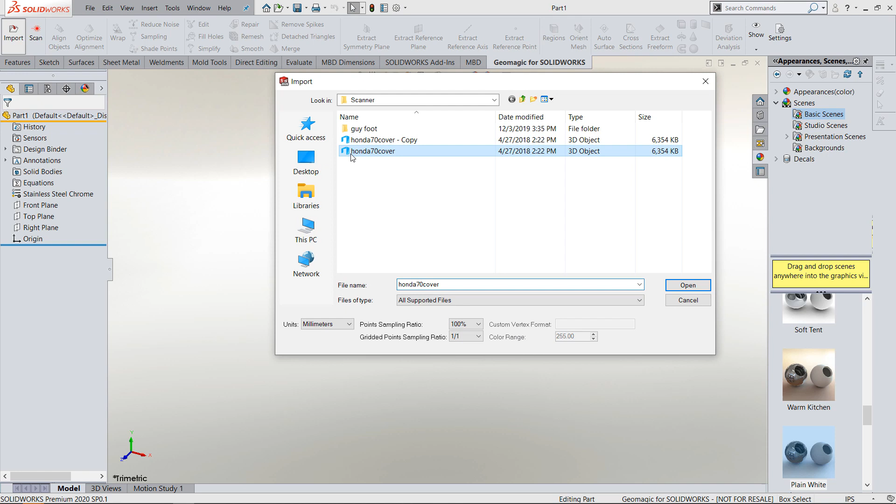From there, we go in and start a new part from scratch, making sure that we use the right units, or the same units that the model was scanned in. From there, we can use the Geomagic tool to import the scan model.

Now you notice how fast the scan model comes in with Geomagic. A large model that's 50 megs can come in seconds.

From here you can see the model was scanned. The model that was scanned was really an old broken side plate from my SL70. It's got holes in the top. Really the scanner created the holes in the top, but I left the sticker on the top.

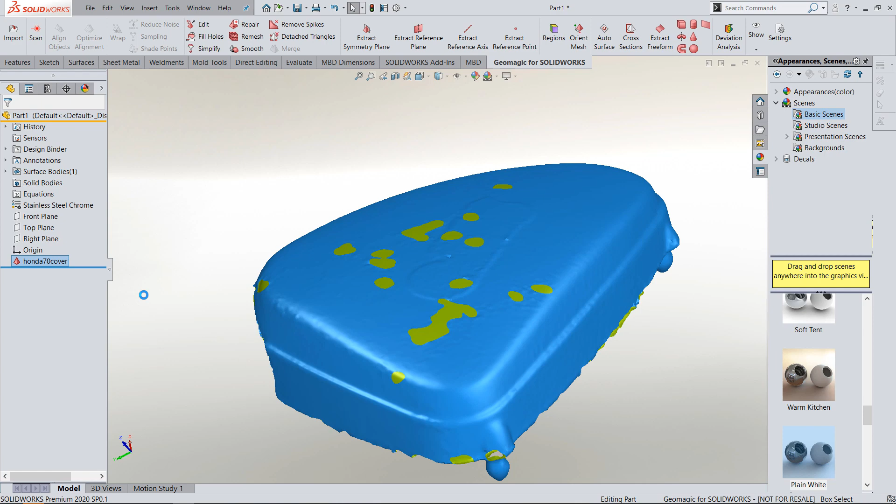You see the sticker. So I want to go in and duplicate the original scan so I don't mess it up. I'll use one as a backup.

I can rename features, I can reorder features in Geomagic. Every feature is independent and acts as though it's a native SOLIDWORKS feature.

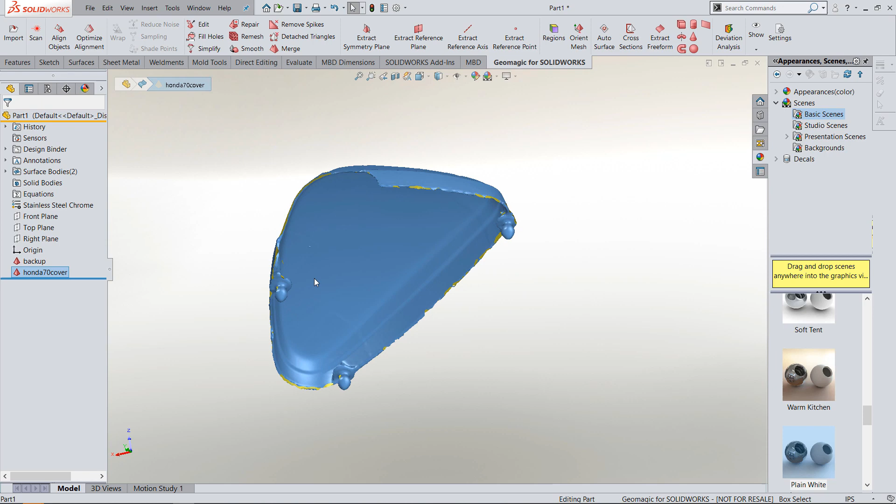It's kind of nice. From there, I kind of need to go in and look at establishing some planes that I can start working off of.

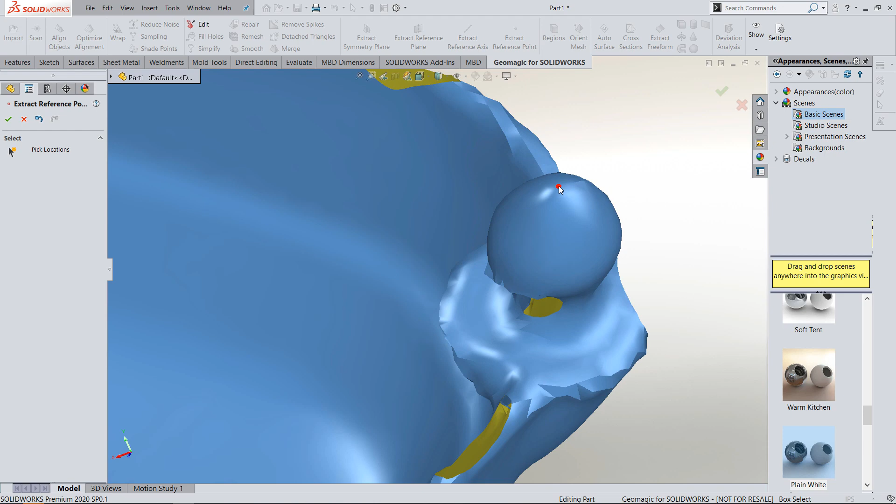What I really want to do is reverse engineer that top shape of the cover that's visible to the eye. So I've got these mounting bosses that I can utilize the very top tip of to go in and insert a Geomagic point.

Geomagic's got a nice point command. I can do a whole bunch of points in one, and I can go ahead and close out of them.

I might have put an extra point on there, and seeing that they act as SOLIDWORKS features, I can just go ahead and delete it independently of the other points.

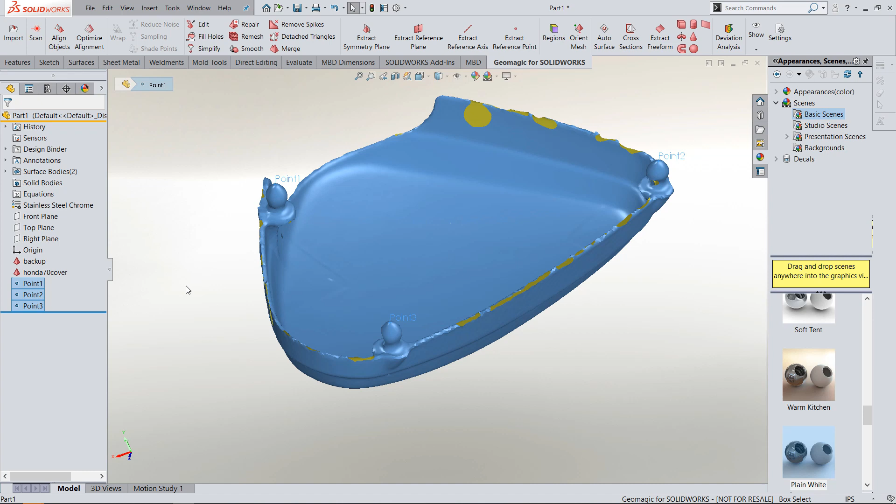And then I can go in and utilize the other points to create a sketch on. So I'll go ahead and pick those points and say create a plane.

From here, I'm going to use this plane to drive another plane down to the surface that I want to start using a manual technique of tracing around the cover.

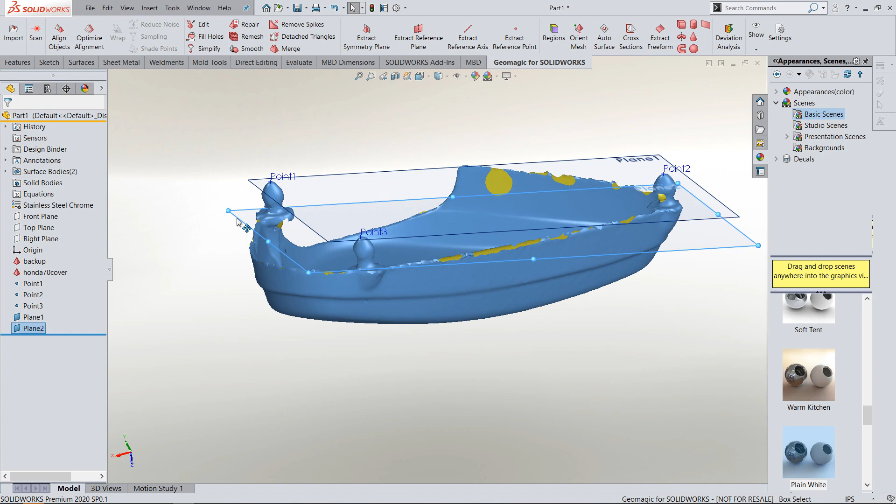Geomagic also has an automatic tracing command, but I tried using it on this cover and, seeing that the scan's so bad, especially right at this level, you get too many jaggies, and I don't get the parametric type of sketch that I'd want to drive forward with, to double click on dimensions and make some subtle changes to tighten it or tweak it around a bit.

So when I look at this cover, I can kind of see that it's probably three main arcs. Let me try sketching around here and see. But I think I've got three, I'll even say 3-point arcs.

One that kind of starts here, on the side as well, and then over here on this side. So I can kind of see three-point arcs connected to all the corner arcs, which would probably be tangents.

So again, let me just go sketch these and eyeball this out. So, and again, go in and do some tangent arcs across the whole sketch, get another one.

Maybe I should have turned off that plane that I don't really need to see now, but I'll get that later. Right now, I just want to use the simplest way, using the flyout menu, to click the point and make it tangent, making sure that I've got all my tangencies, since my last pick I was a little sloppy on and didn't get them.

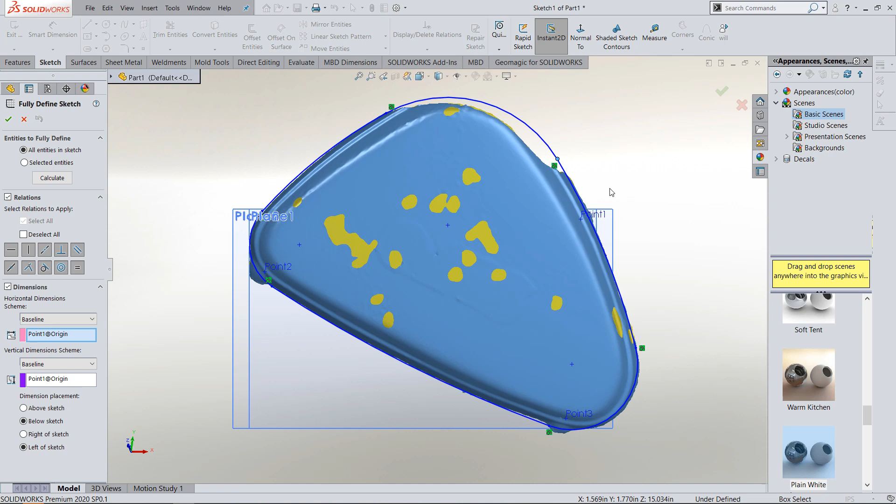Let me automatically dimension it. I'm not really concerned about the locating dimensions from the origin as much as I am the arcs, if I wanted to come in and start bumping them around a bit, but I like what I have here.

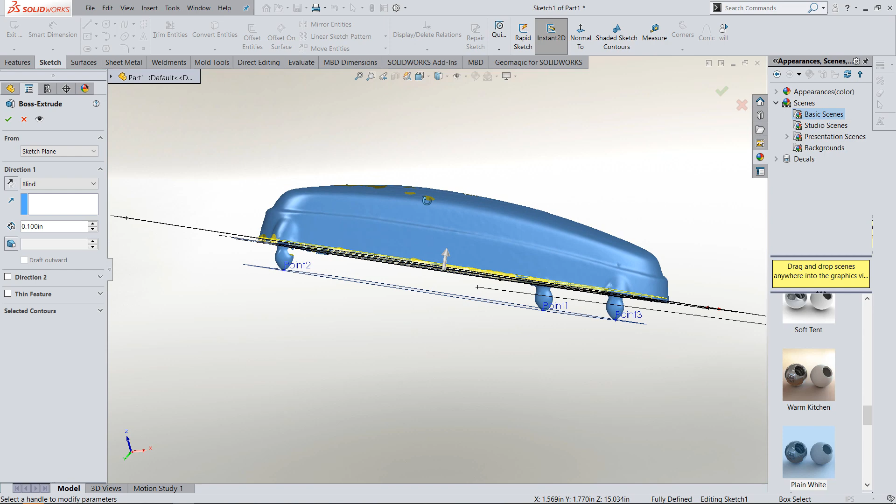I'll go ahead and hit the extrusion command and extrude this up. I didn't turn off my scan because I want to reference it. I'm doing a combination of utilizing Geomagic to work off the scan.

And also look at, as I model it, how close I am to modeling right on top of the part. So I'm just kind of eyeballing this. Maybe I can come in here and give it an exact number if I want.

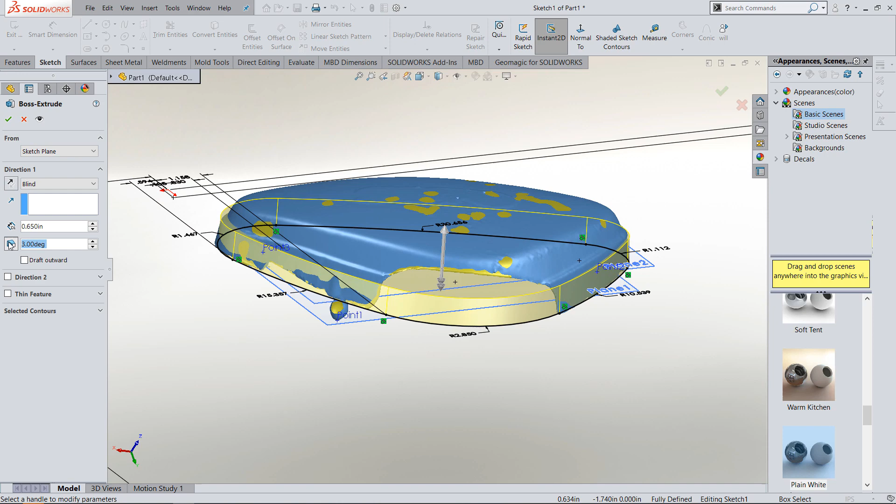And I need to go in and put some draft on it. Probably need to again resort back to the scan a little on that and see if it needs to be a little more or less.

Let me see, bump it up to 12. Looks like that's maybe a little too much where I started. Probably is going to work better. Doesn't have to be exact here again.

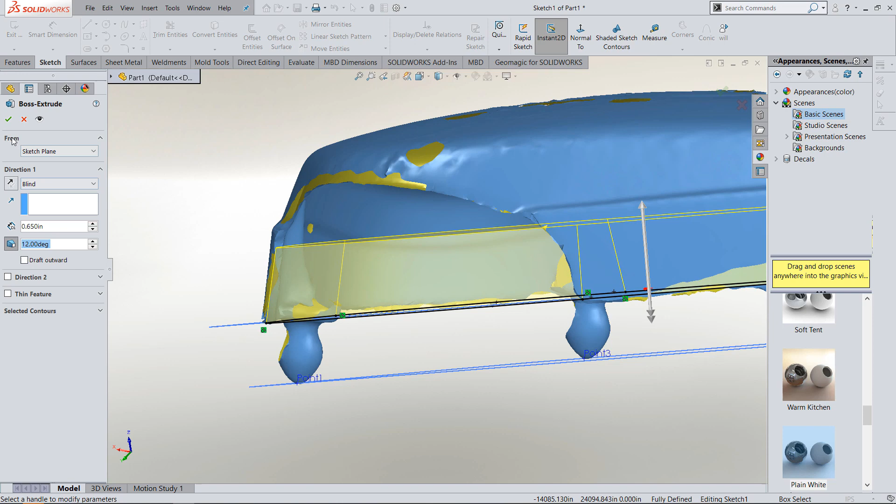So not for this application, which is nice, but I do want to get that top surface of the cover, which is going to be a little hard to do in any other tool I've seen.

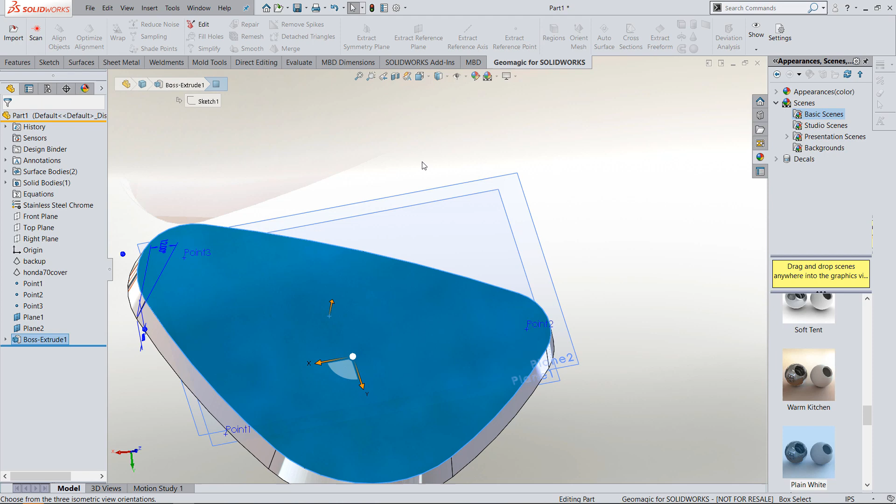So here, I just need to make one more boss extrude where I come in and use a sketch that I offset the edge and bump a second feature up off my base feature. So let's just go in and do that.

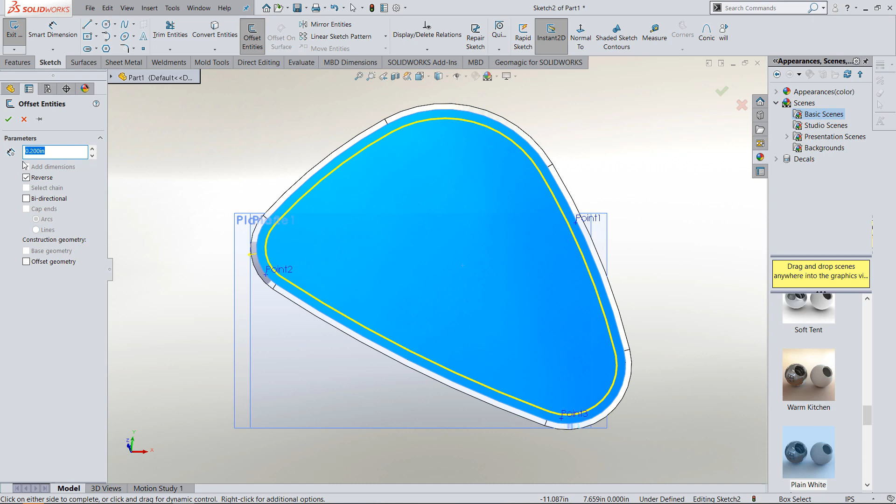I'll make the sketch, go in there and offset the edges of the sketch, offset them to the value that you want, and make sure that if it's not going the right direction, that you reverse it.

You can also do that after the fact these days by clicking on the dimension, and a reverse option will come up in the property manager.

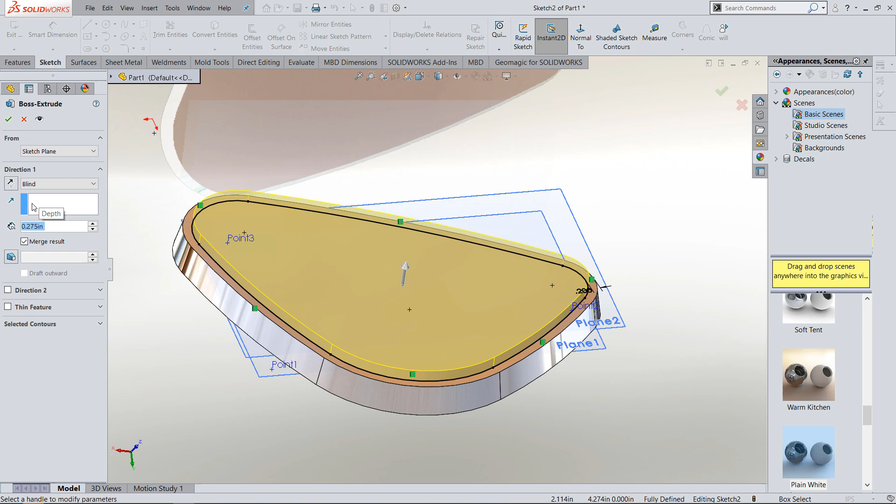From here, I want to extrude this up. It could go just about any distance - above the cover, below the cover, or halfway through cutting part of the top. So that's the number I'll try to come up with. I also need to put some draft on there, using the same 12 degrees I had on the other base feature. I think that'll work pretty good.

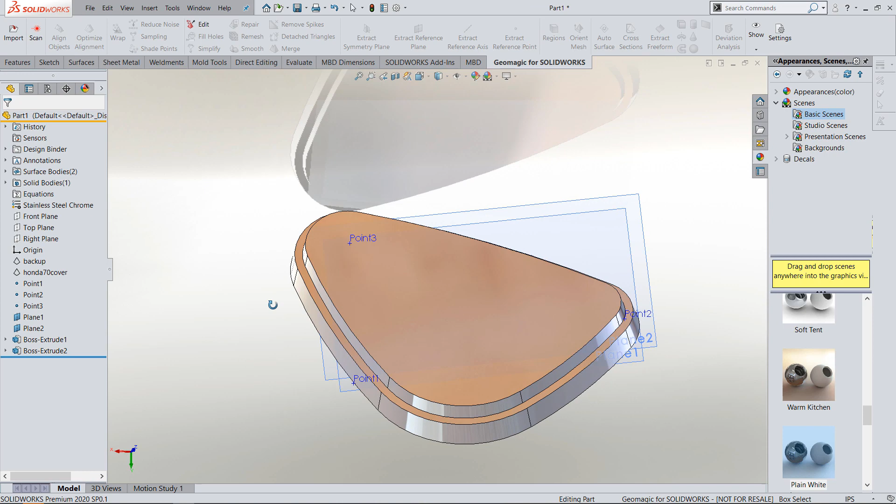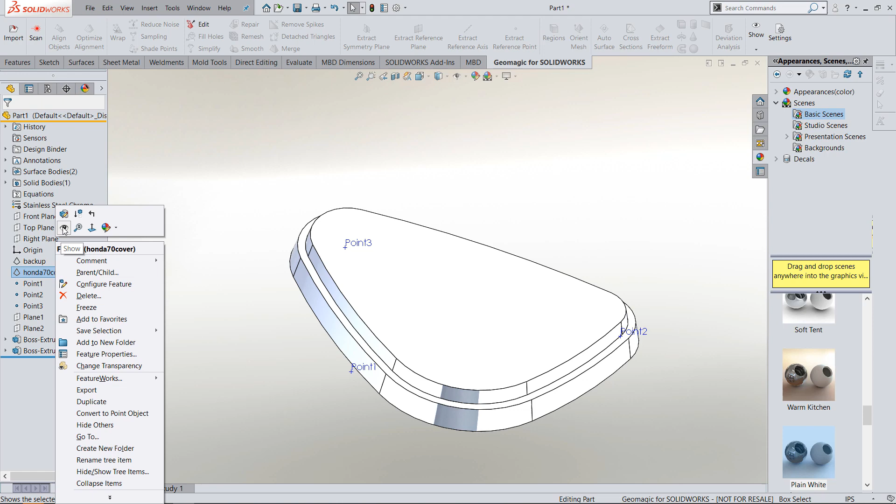From here it really comes down to utilizing that sketch again. I want to turn off some of my shininess so I don't glare you with the mirrored look on my part. Let me go in and turn back on the cover. Everything's so snappy inside Geomagic when working with scans - it's really nice in that respect.

Now I want to use the extract freeform command with the sticker on top and all those holes. All I really have to do is grab the surface I want, and it projects a freeform surface right onto it.

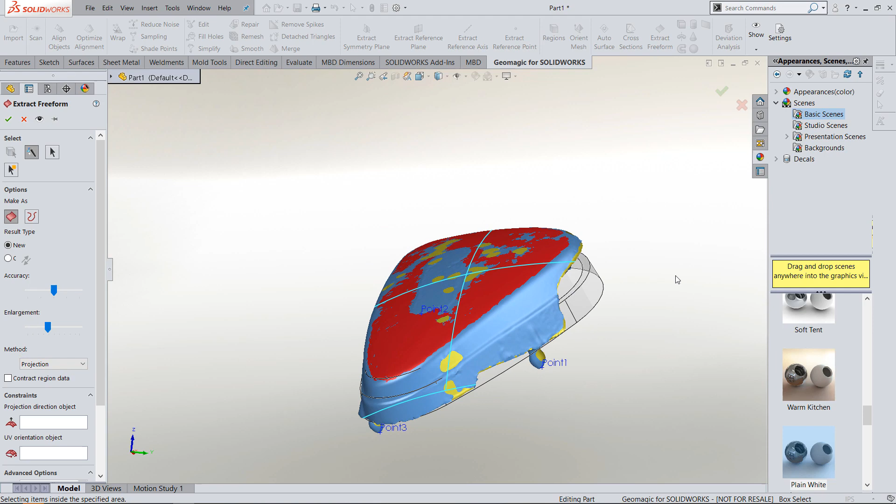While doing this, I can look at the deviation analysis and set the tolerance to something more realistic - around 15 thousandths of an inch. You can see I'm pretty spot on the top of that cover. I could get more accurate by sliding the accuracy slider, but I don't need that type of accuracy for this, so I'm just using the defaults.

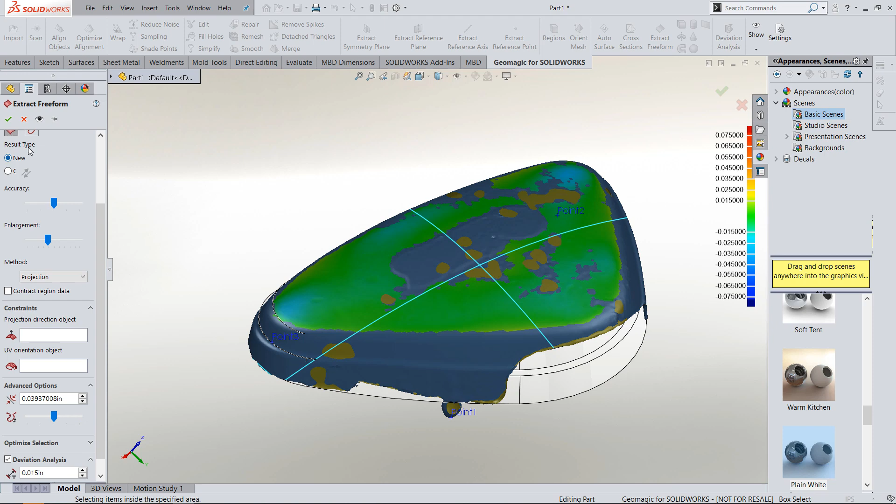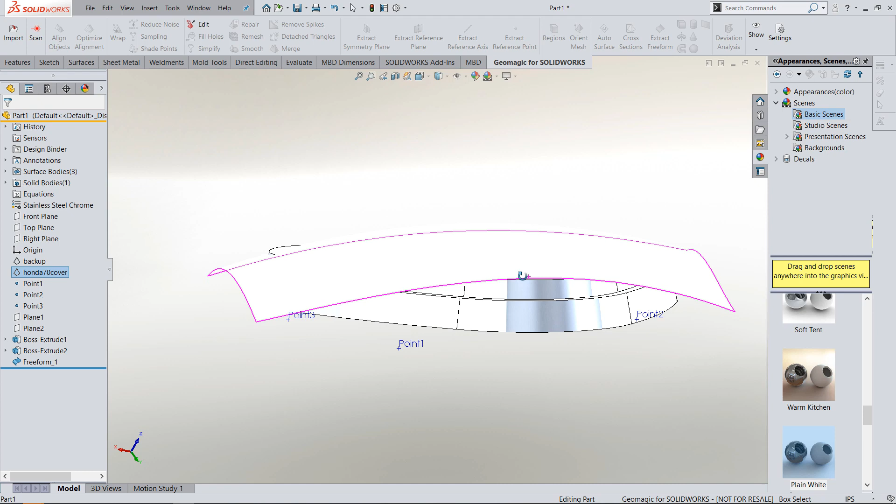Select OK and use a projected surface. From there I can turn off the original scan mesh that I don't need. You can see I did make it extend past the surface, and it's also below the surface.

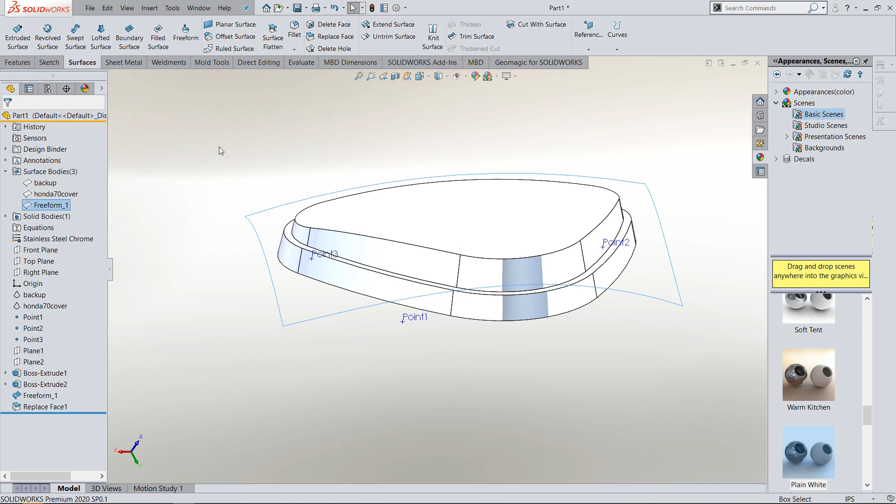This is where a surface intersect or feature intersect command could work, or if it's just one feature, you can use the replace face command like I'm using here. For one face it works really nice - you pick the face you want to replace, pick the face you want to replace it with, and voila, you've got the new part with that top surface really reverse engineered off the original cover.

And I'll even say off the original cover that was poorly scanned, which is often the case with a lot of scans, regardless of the scanner type.

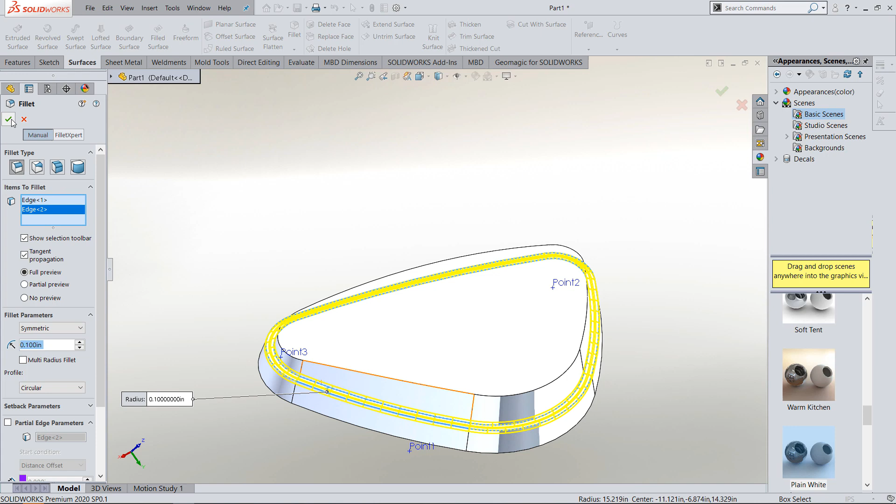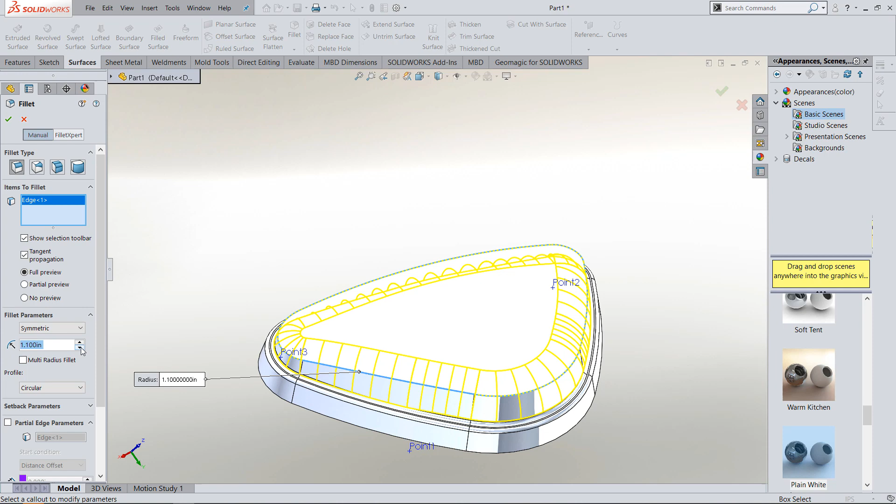So I'm just putting some rounds on here now, finishing the part up. I could get fancy with continuous curvature, variable radius rounds, but realistically the side plate cover I scanned is really one continuous curve around a freeformed surface. I like taking this up until failure, seeing how far it goes, and then backing off a bit. It's probably not that well rounded in the original model, but I'll go with it because I like it, and it's starting to look pretty good.

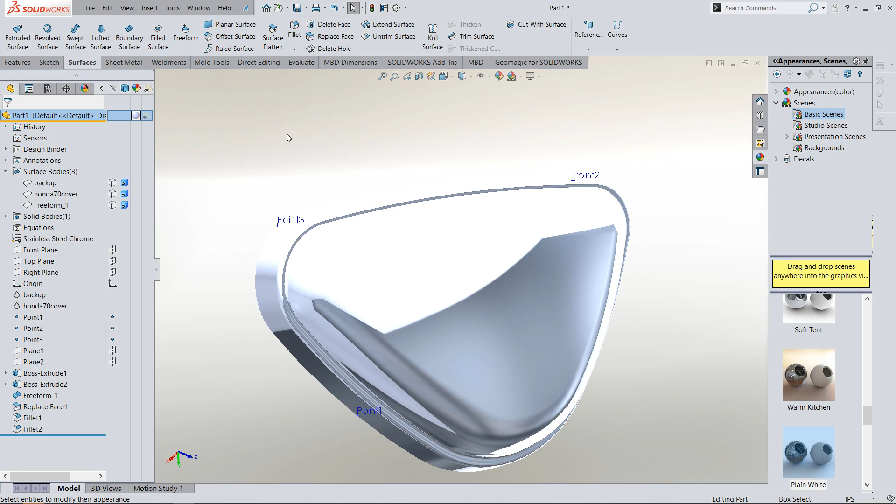So there's a few more things I want to do. It is a red Honda SL70, so I might as well go with red. It's a little bright, but it is my Honda red. So let me get back to work.

I'll go ahead and shell out the model, and make it 80 thousandths thick - somewhere close to what it is if I put micrometers on it.

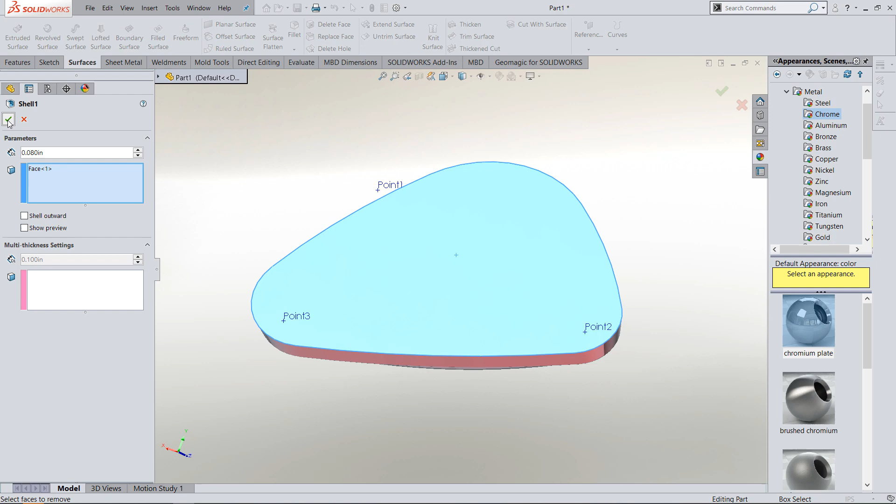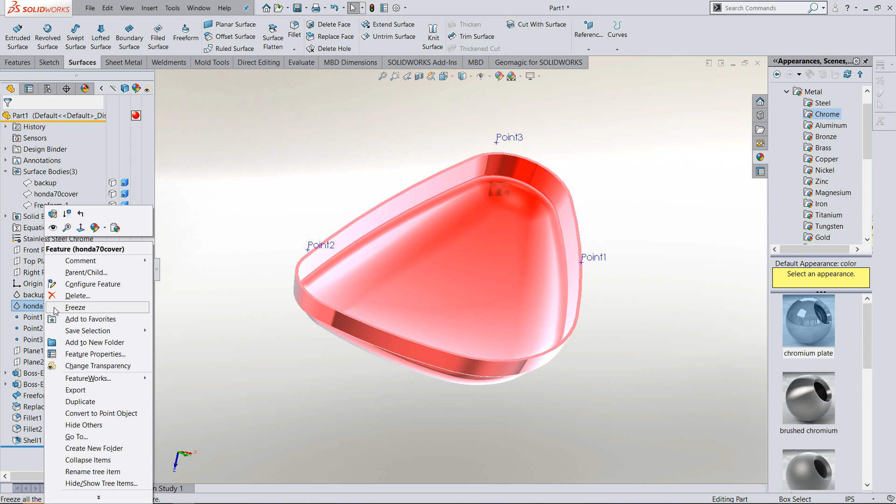From there I can go in and again utilize my original mesh to locate that attachment boss, which goes through a rubber grommet hole. So let me just show the original mesh again. We'll just revolve this and move on.

I can see my nub's way too skinny - I'd really need to go in and fatten the bottom of that revolve sketch, but you get the idea. I could put rounds around my boss on the outside and such, but what I'm really after here is finishing with the surface deviation.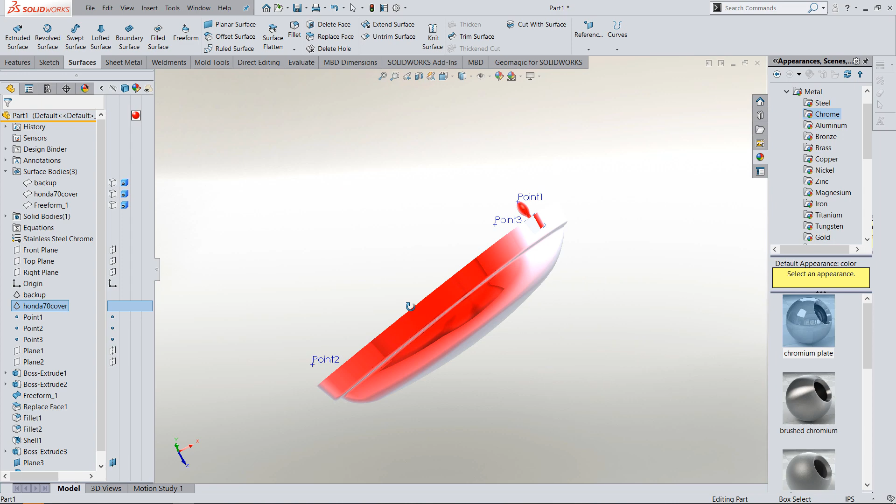Now this is a really nice command, and they've put something like this inside the new 2020 SOLIDWORKS, but it doesn't quite work as nicely as this one. We have more variables we can tune in on for accuracy, and it gives you a bit more color charting here.

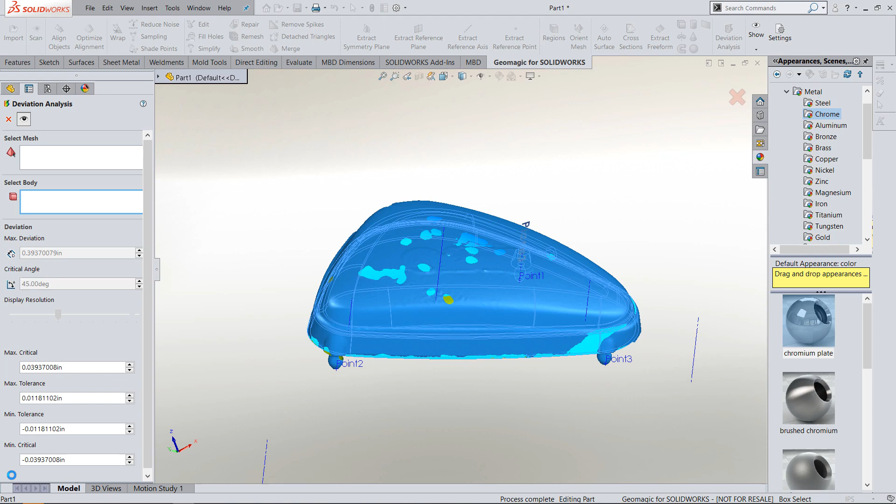So again, I can just come in and see my model, change any of the variables over here if I wanted to focus in on how accurate it was. But again, what I was after here is really reverse engineering the top surface of that model that had the ugly sticker and the poorly scanned holes in the top.

So there you have it - Geomagic for SolidWorks for reverse engineering a 1972 SL70. That's what the bike is, a 1972 Honda SL70 side plate cover. Thanks once again for watching.